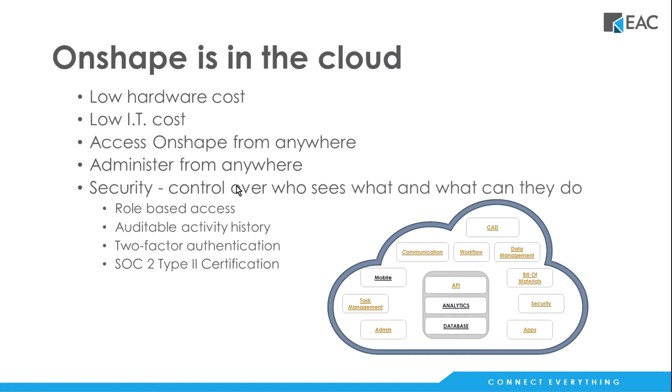It's also very secure in the cloud. We run on Amazon Web Services, but we have role-based access, a complete audit history of everything and everyone who has accessed or worked with anything. We also have two-factor authentication, and Onshape is certified to work with other people's data. That's what this SOC2 Type II certification is.

Interesting thing about Onshape is we release software all the time. Every 3 weeks, new improvements are added to Onshape, and everybody is on the same release. Since you're hitting the cloud, you're hitting the same version of Onshape, so you never have those issues of being out of sync with maybe another customer or vendor you're working with. Everybody is on the same version all the time.

Also for innovation, you know, some companies are a Dell house, an HP house, an Apple house. You don't have to be any house if you're working with Onshape. Any type of hardware you have, Onshape can use to work with. Very few people, I don't really know of any, but I'm gonna think there's gotta be somebody out there that is broad and available to use so many different hardware platforms, that kind of flexibility is what Onshape can do.

Also, speaking of innovation, we can talk about collaboration and communication, not only between us inside a company, but also with our partners or vendors maybe outside the company. There's real-time collaboration where we're working on the same geometry, the same drawings, the same information as everybody else. There's no copies, this concept of files and making copies and checking in and checking out and all the traditional stuff like that. It's not like that at all.

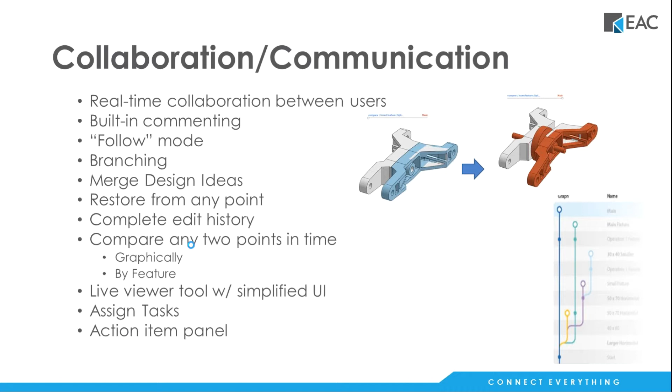We also have a great variety of design tools that allow us to do a lot of interesting things. First of all, we have a modern feature-based parametric system, but we also have the concept of multi-body or multi-parts. We can create a number of components in a single part, but those components can also be separate, used to make drawings of each one, and added to other assemblies.

Custom features, speaking of creating things that maybe don't exist in Onshape, everybody has the ability to create their own. There's also a library of customized features that people have made over the years, maybe for structural steel or gears or things like that. Those are all available—you just add them to your Onshape and you have those capabilities as well.

There are non-parametric editing tools. So if we're bringing in information to help us innovate, a lot of times we might have to leverage information that wasn't made in-house, maybe from industrial designers sending us ideas. We can bring that information in and work with it. Using non-parametric editing tools, we can still push and pull, change radiuses, move ribs, and do all those kinds of things to get things the way we want.

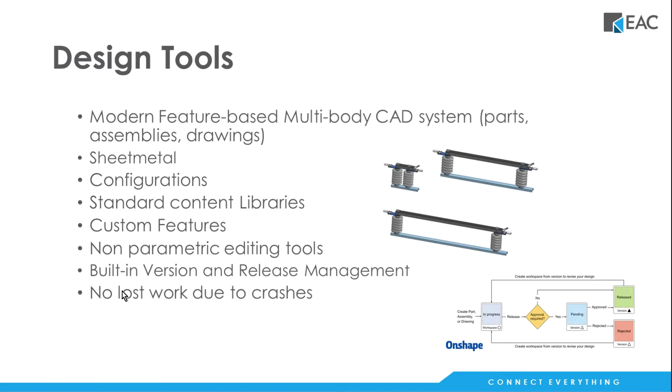So with that, let's kill the PowerPoint and talk a little bit about Onshape and work with it. I log into Onshape—this is my home page. Here I see components, assemblies, and things I've worked on recently, along with different folders that either I've created or other people have shared with me. This is how we organize our information.

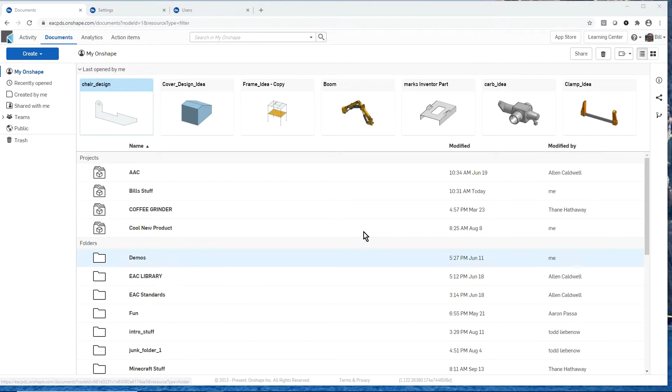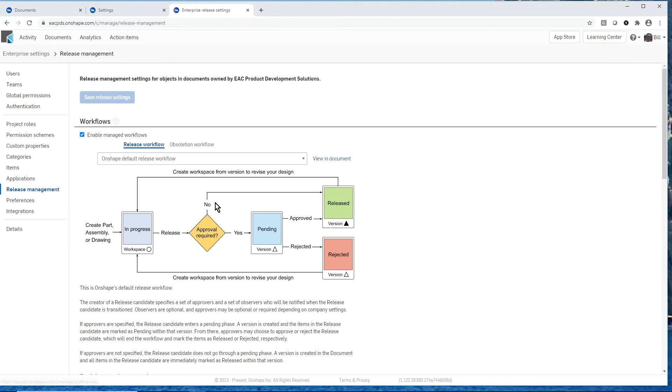We also have release management built in, which is that workflow we saw earlier. There's also an automatic part numbering mechanism, so we can have a prefix if we want, set how many characters are in our part numbering, and it automatically generates those part numbers as we go forward. This is customizable, but at least you have the capability to use automatic part numbering if you want.

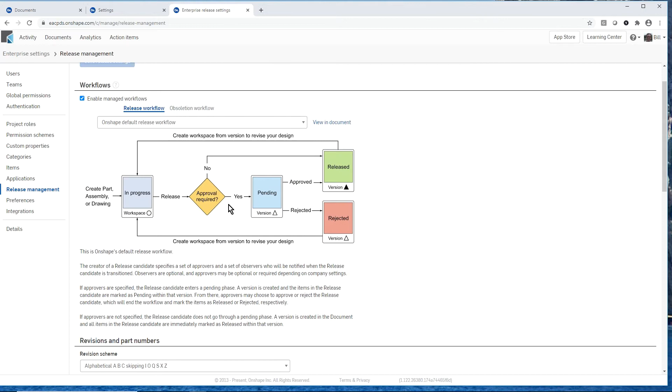From a personal or user level, we can set up our defaults—these are the questions you're asked the very first time you log into Onshape, like what kind of standard units you want to use. You can always change these later, but it wants to know a default. Going further, since most people using Onshape have come from another CAD system, it asks what CAD system you came from, so it can make the mouse behave exactly the way that system did.

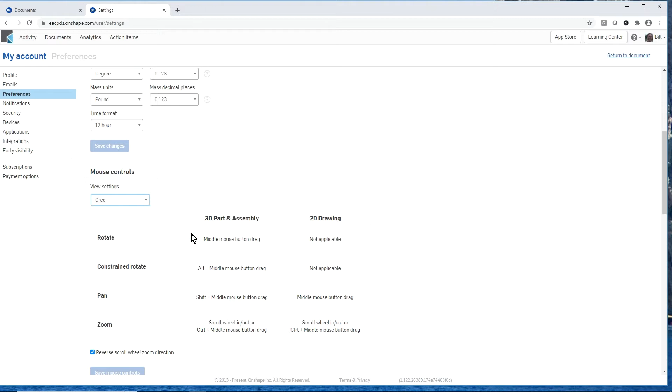So you can learn Onshape faster. There's also this capability, we see this in other systems, a little pop-up menu where we can customize the different commands that we want to have on that pop-up menu. Again, so we don't have to move our mouse and move our eyes, that fatiguing thing. If you're working on a CAD system or a computer screen all day, this helps alleviate some of the fatigue you get from doing something along those lines.

But let's go back and talk a little bit about Onshape. I'm going to open up what's called a part studio. So when you start Onshape, you start a part studio. A part studio is the information that you would store that has to do with a particular part or product that you're working on. So for instance, I have a sketch here that I'm going to start out with.

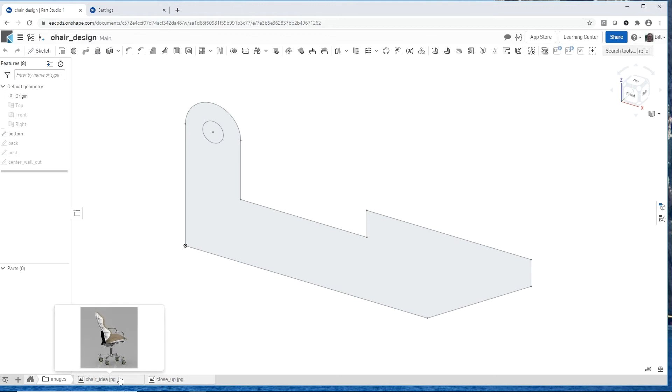But I also have some other information here. I put a folder in my Part Studio, and if I open that up, I have a couple of images. So where we're going to go today is we're going to design part of this chair that we see here. These are basically the components that support the chair. We can zoom in on that a little bit more and see a close-up. These will be the components right here that we're creating.

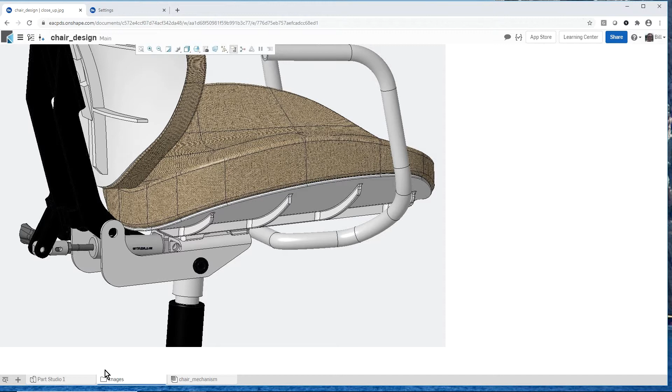And so this is going to be some information. We got this from our industrial designer. This is the kind of chair that I've developed. Can you now, as a mechanical person, develop this product so that we can sell it? So really, I could have spreadsheets in here, customer feedback, results from different types of analyses—all kinds of things can be stored in this Part Studio.

So let's go back and take a look at our sketch. Just looking at it here, it's really straightforward—just some lines, an arc, a circle. Nothing too crazy here, but we're going to use this as the base for our chair.

So you'll notice from the interface across the top that these are all the commands Onshape has. It's a very clean, easy to use interface, easy to learn. So here are all the things for parametric capabilities. Here are the non-parametric ones I mentioned before. If we're getting geometry that doesn't have numbers we can change, we can still grab faces and edges and groups of geometry and manipulate those.

We also have sheet metal capabilities, so we see those over here. And then here's some user-defined type features I mentioned before. Here's one for structural beams and things that I've added in that I use sometimes. So all the things that I need to create any types of geometry are right here.

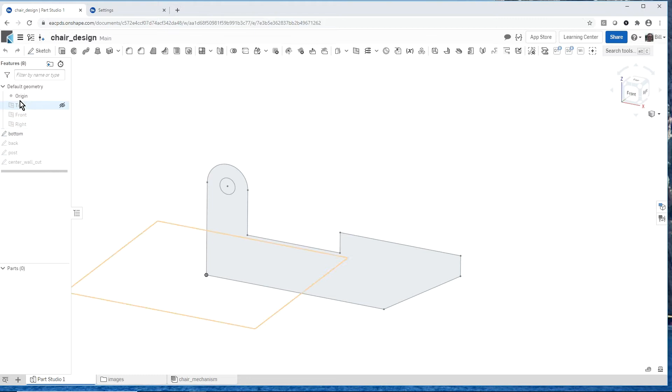Here's our feature tree, or kind of our history tree, everything that we've created. So you can see we started off with 3 planes, and then we got some sketches here. And we have no parts yet because we haven't created any geometry, but if we have multiple parts, they'd start showing up here. So let's start doing that.

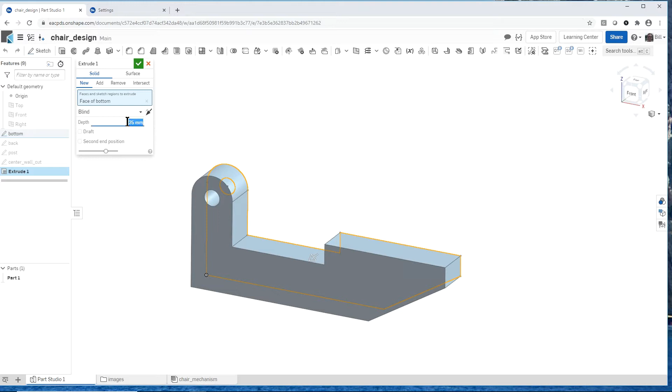So I'm going to grab this sketch, and I'm going to say let's extrude this out. We'll say we're working in millimeters, so maybe 100 millimeters, and let's maybe do it symmetrically, something like that. So now I have a first start at this.

So every feature that we create in Onshape has this type of an interface. We have all the options here, and then you either hit the check mark—you want it—or X, you don't want it. But you'll notice as soon as I put that in there, I put this in as part number 1. And I can name this whatever I want. I can assign material properties to it. I can change its color—all these types of things I can do with this particular part.

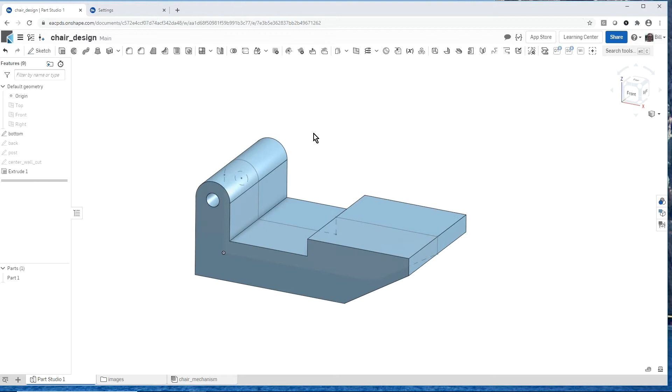So let's go in and hide that sketch for a second. Let's start to hollow this out. So I'm going to use a command called a shell. Typically you use that to make a thin-walled part, and this is pretty much kind of a thin-walled part.

Maybe before I do that, though, I might want to save myself a little bit of work by just putting in some rounds. So I'm going to say let's put in, maybe a radius of like 6, and add it to an edge here, edge back there, and then maybe put in a different radius. And again, when I start offsetting this by putting in these radiuses now, it's going to save me from having to put in 2 sets later on. And then let's just put in one last one, kind of a big one down on the bottom here.

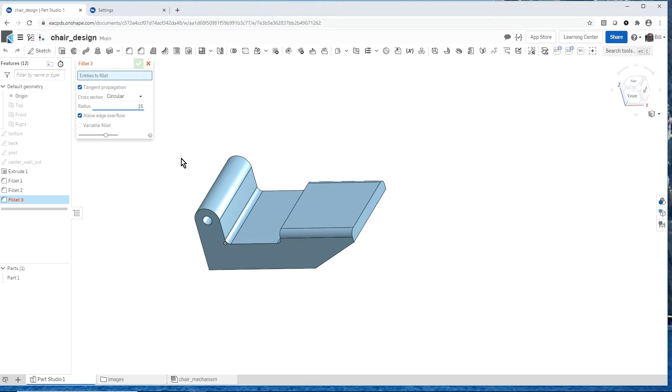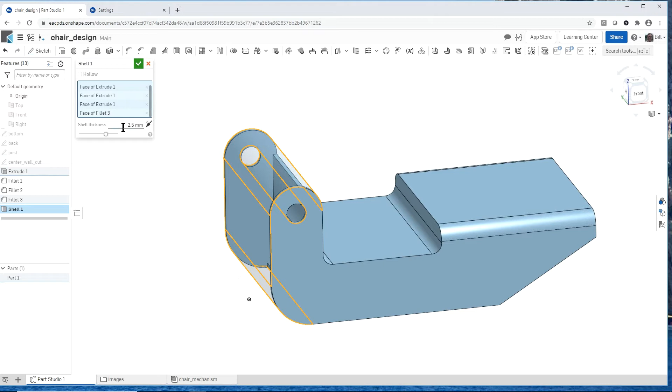So now we've got something we can start working with. We want to start hollowing this out, so I'm going to use the shell command and just remove some surfaces. All I do is pick on the surfaces and they start going away. I can specify the wall thickness, so let's make it about 4 millimeters thick. As I pick each surface, it removes that material and gives us a wall thickness of 4.

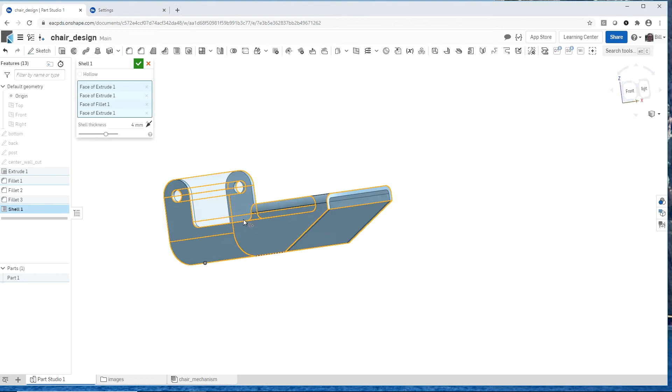So this will be our part so far, sort of a stamping or sheet metal part, but technically it isn't. We're going to have to create some other geometry for this. Obviously this is the bottom part of the chair that the seat sits on, but a chair always has a post on it, so I'm going to have to go create that.

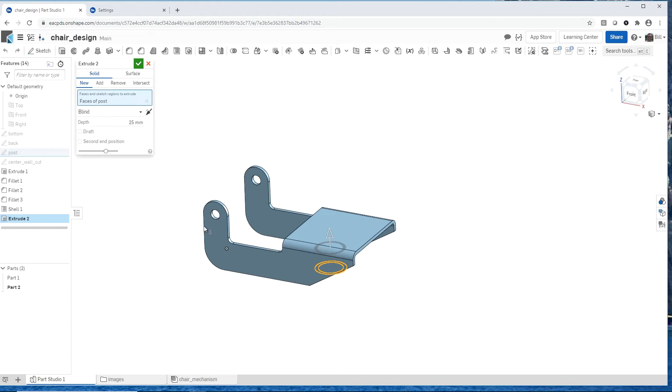So I have another sketch over here. I'm just going to take this and say let's extrude it. You'll notice the first time it extrudes, it asks do you want to make this a new part, do you want to add it to the existing one, do you want to remove it, or do you want to intersect it. These are the typical kind of Boolean-ish type commands.

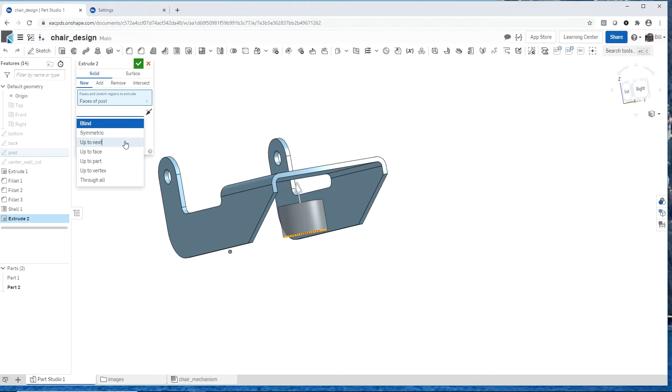We also have surfacing, so we could be doing this all in surfaces. What I'm going to do with this particular part is, instead of going blind distance, I'll say go through until you hit something. As soon as it hits that part, it asks if maybe you want it the same as this part. Notice it switched from being new to add, and we no longer have part number 2 down here—it's now considered part of part number 1.

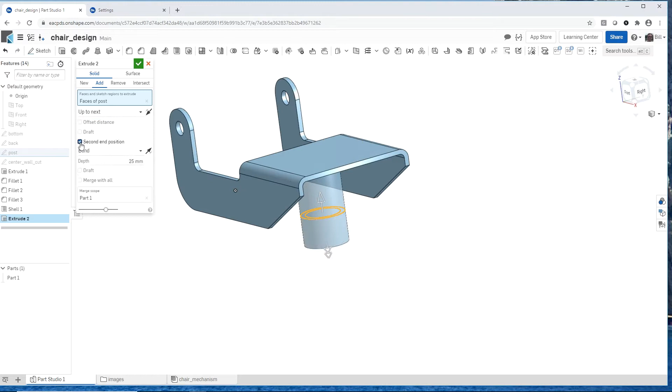I could switch it back and make it independent, but it's all part of the same part—they get welded together. And in the second direction, I want it to go down maybe about 25 millimeters. So now we've got a good start on the part we want to create here.

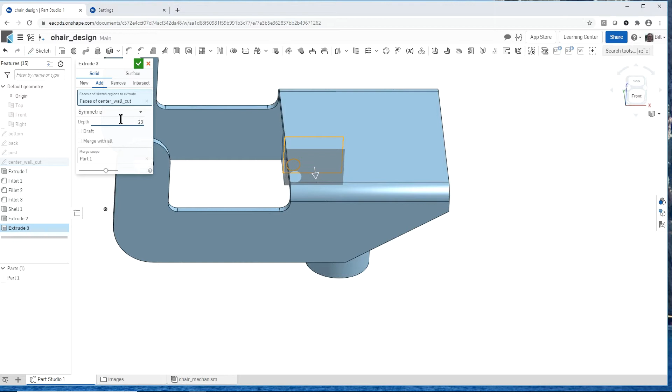Another thing I want to do is maybe make a cut in here. I'm going to take this and extrude it out symmetrically. I made a couple sketches in here to save some time—here's the thickness we want. Then let's take the same sketch, and this time we're going to remove material symmetrically with a different value. So now we're making a little cutout—this is what we have.

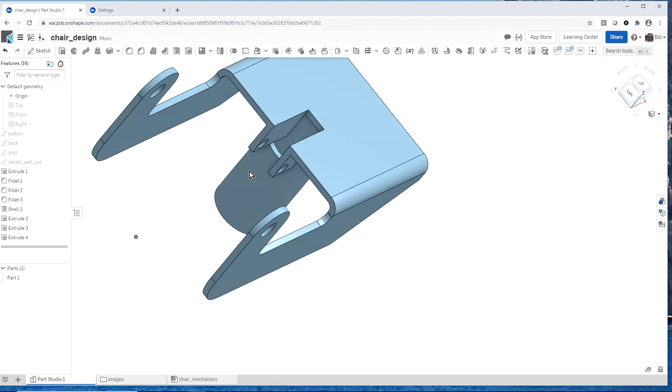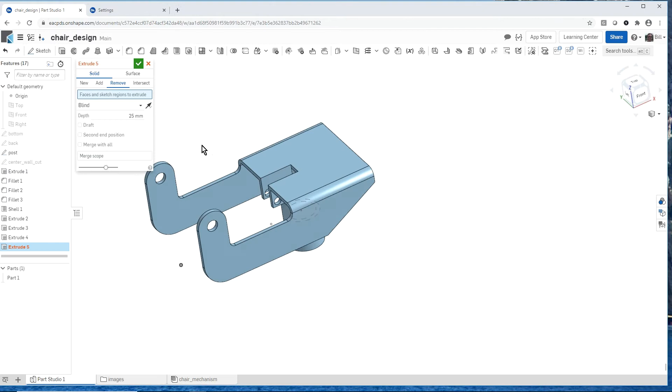One of the other things is the post still has to fit through here a little bit, so let's take that and extrude it up, and we'll remove material. We have to pick this face, that guy, and we'll flip it and just drag it through. Something like that—a clever approach would be to say up until surface or something like that, but we'll just leave it like this. We're just cutting some material through there.

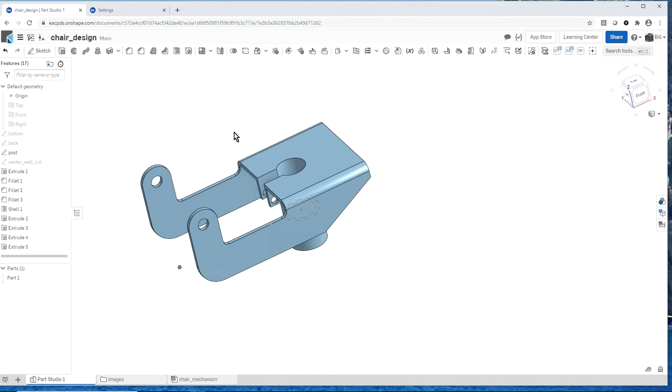At this point, maybe we're going to put in a couple other radiuses just to finish off the general idea. Maybe put this in, maybe a radius of 8, and then something along the top too to round that off.

So now we've got something we can work with—this is the start of our chair. Up until now, other than the fact that we've been in the cloud the whole time, it looks like a lot of other CAD systems out there.

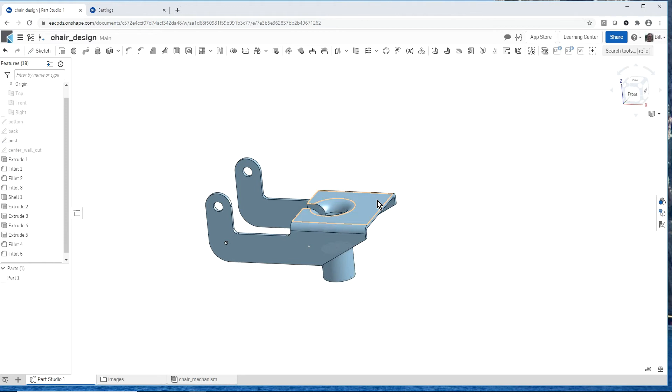What I'm going to do now is something other CAD systems can't do—I'm going to look for help. We have a guy in our company, not here with me, but I want to invite him to create a sheet metal part, kind of the back part for this. I can make some comments on things, pick on a surface and say I want you to look at this, and create a general comment. For who it's to, I start typing his name and it searches the list of people in my company. Here he is, and I'll just say, can you make a sheet part?

And I'm going to assign that to Nick, so it's going to show up on his to-do list of things to do. When I say assign now, he's going to get an email that says you are now sharing your part with Nick. Up until now, no one has had any access to this.

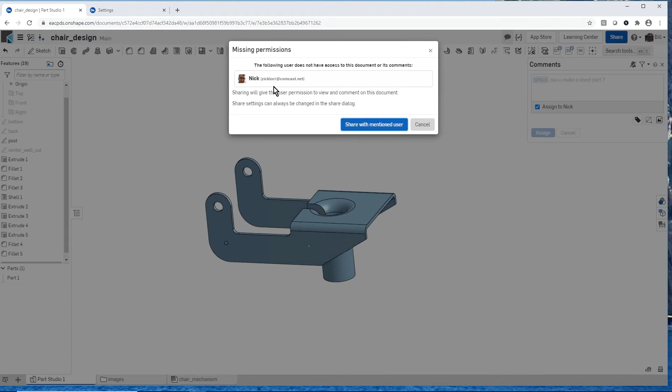So that's kind of the way Onshape works. You don't send out copies of things, you give them access. It's like a whitelist—who do you want to have access to this, and when they have access, what do you want them to do with it? You have total control. As soon as you don't want Nick to access the part, I just hit the little X next to his name and he no longer has access to it. But he gets an email.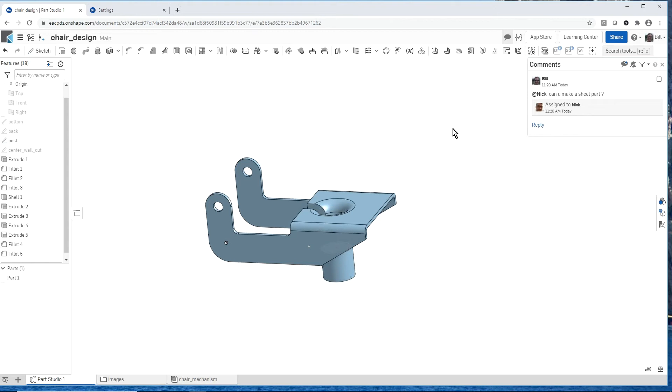So let's take a look at what that looks like. If he clicks on the email, so this is Nick over here, he'll log in, he'll sign in. The hyperlink said Bill's sharing a part with you, and you can see here, assigned to Nick: Nick, can you make a sheet part?

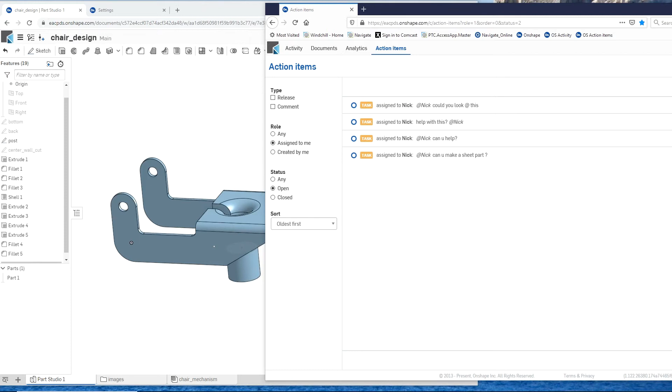So he can go and say, sure, let's take a look at this. He can select on it, he can see the chair here, and he can say, let's view this.

So the interesting thing here is that Nick is going to see the exact same thing. I'm inviting him into my session to start working with this. You notice his little comment screen is popping up, and he sees the same part—it's not a copy, it's the exact same part.

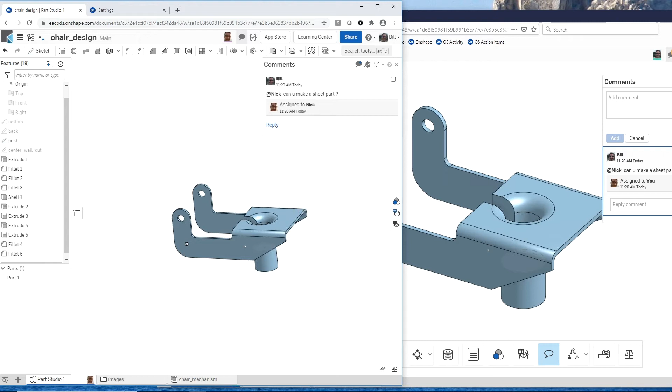Now, one of the things we can do is I could say I need you to work on this, and I can comment and things like that. But we can also do something called follow. So he's going to follow me, and as I zoom in, he zooms in. As I rotate, he rotates. So he is following me.

And really what I want him to do—you notice his cursor has changed to a pointing hand—I'm going to say we need you to create a sheet metal part in this area that fits between here and here, and will be the back part for the chair. So I can explain that in words, or call him on the phone, since he could be somewhere totally different than where I am. Lots of different ways we can communicate, working together collaboratively like this.

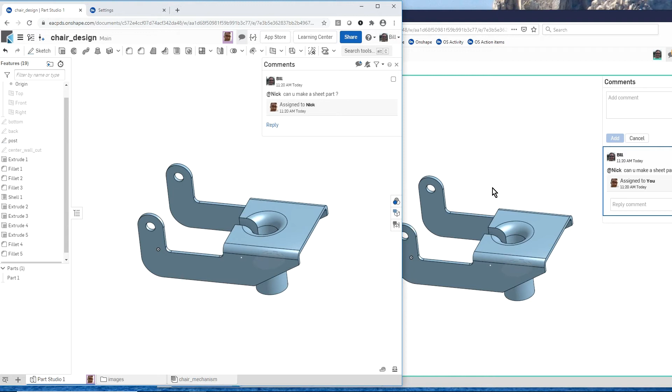He's also totally independent to do whatever he wants to. He's not forever tied to me and what I see. So one thing you'll notice is his menus are different than mine. He has the ability to do cross sections, make comments, change colors, explode things, measure things, but he can't create any geometry.

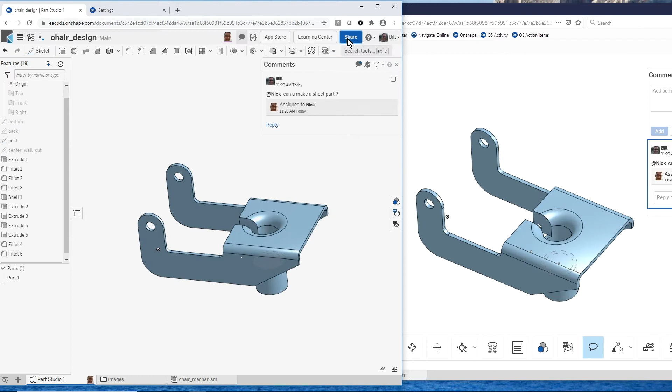So what I'm going to do is give him the capability to do that. Under our share settings, I can change it—right now it says he can view. I'm going to change that so he can edit things as well, create geometry. And I'll say he can make a copy of it, but I don't want him to export it out—I don't want this thing going anywhere else but here. Then I'll update his capabilities.

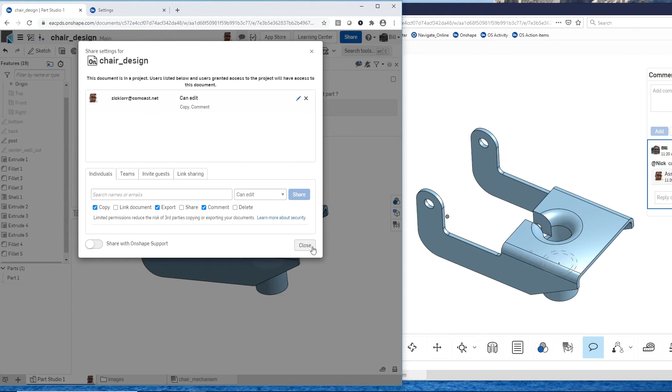So now all Nick has to do is refresh his browser, and you'll notice his menus down here will change, and he'll now have full capabilities to do the work he needs to do, while I keep working on this part. I could keep it like this where he's working with me in here, creating his part while I work on this one, since I've got other work to do, maybe make a drawing, stuff like that.

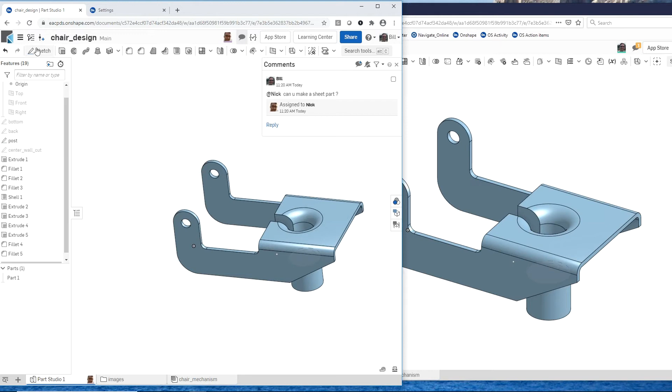What I'm going to do is take advantage of some of the capabilities Onshape has. First of all, we have the history of everything I've done here—where we started off, then inserted some features and created the post and all that kind of stuff. One thing I'm going to do is make a version—just save a snapshot in time and say at this particular point, I'm going to call this, I don't know, the make back part or something like that. So that's our version.

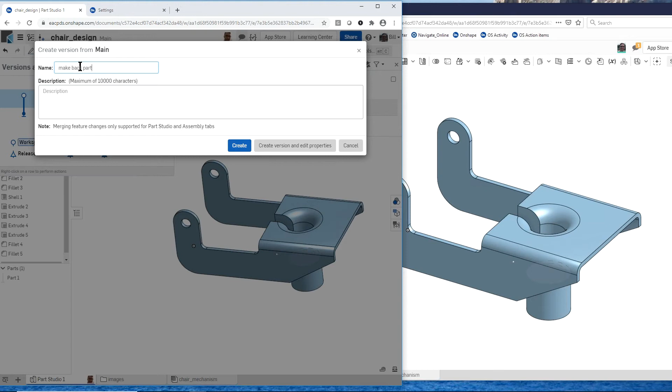You'll notice that's created in our history tree as a little filled-in dot. So I can always go back at this point in time and say, this is what it looked like before we made the back part.

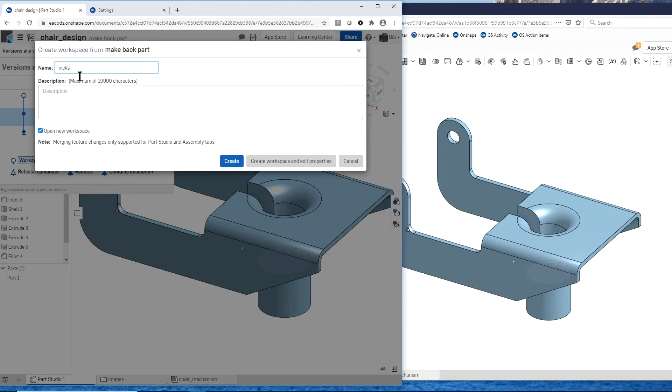But now I'm going to take this and say, let's create a branch. I'll call this Nick's sheet part, and I'm going to give him access to that branch so he can start creating geometry over there.

If I like it, then I'll say I want to use it. And if I don't like it, I'll say go back and refinish it. So either I can keep him working alongside with me in here, or I can give him a branch, and maybe a couple different people, let them do a couple different things at the same time, and then pick and choose which things I want to include. Could be more than one that I want to include.

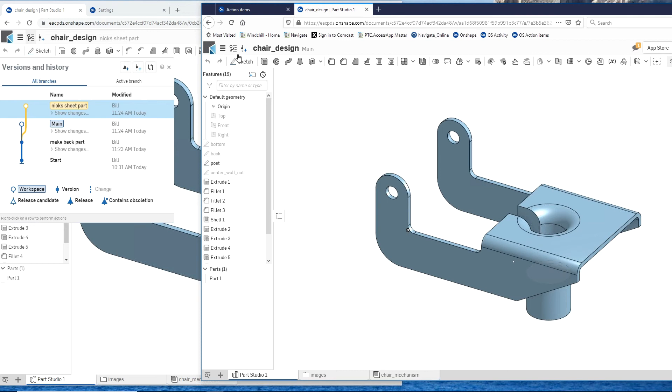So Nick will automatically see this, right? He can go back to this and say, okay, I'm going to work on my branch over here. And me, I'm going to just continue doing my stuff over here. One of the things that I can do is, I'll just show you one thing.

I'm going to say I want to create a chamfer, and we'll say maybe not a real big one. I'll put one here, put one there, put one there. Okay, Nick doesn't see it, right? Because he's in his own branch right now.

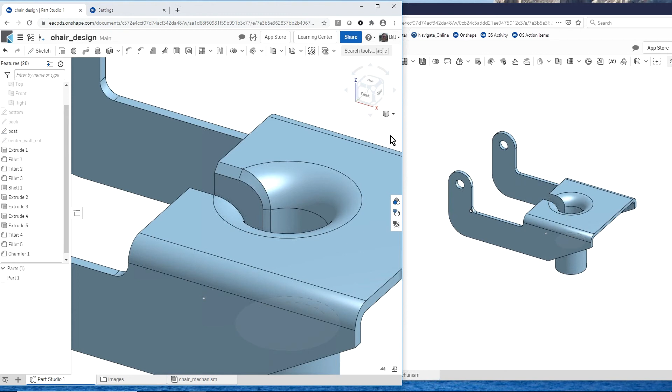So after all, then we can copy in his information. But right now we're kind of on the same part, the same concept. We're just branched off from one another.

So what Nick has to do, because he's kind of the sheet metal guy more than I am, he's going to start creating some geometry. So he's going to create this thing right here. We'll kind of extrude this guy out, we'll say symmetric, and let's say 92 millimeters.

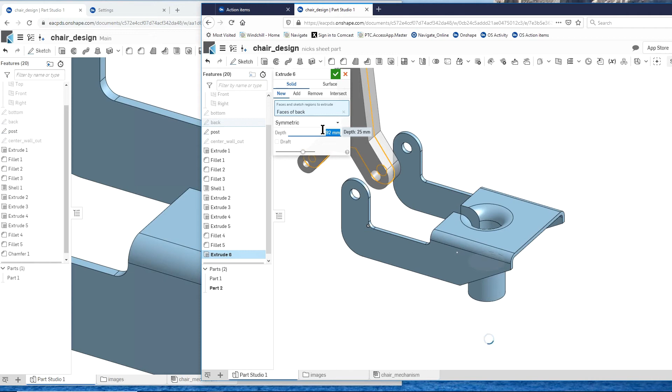So you notice his part kind of fits there, fits inside, so that will work out well for our needs.

One of the things, since he's kind of a sheet metal guy, he's going to have to turn this into a sheet metal part. We'll get a chance to see what sheet metal in Onshape looks like. So he can come in here and say, let's go in and create a sheet metal part, right?

There's a couple different ways that we can do this, but we're going to say let's convert this part into a sheet metal part. And then what we can say is we pick the faces we want to exclude, because we're not going to put sheet metal around all of this. So I'm going to say let's exclude, and it's sort of like shelling it out like we did before.

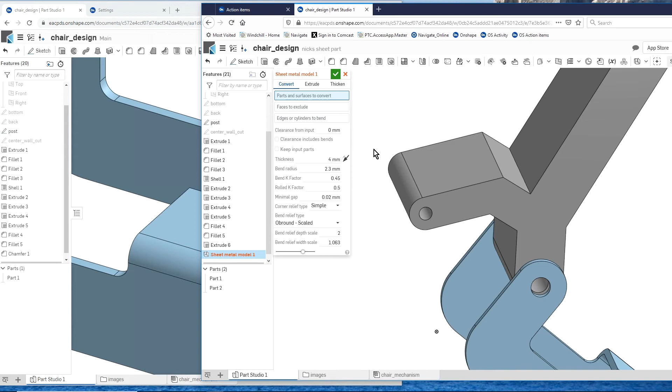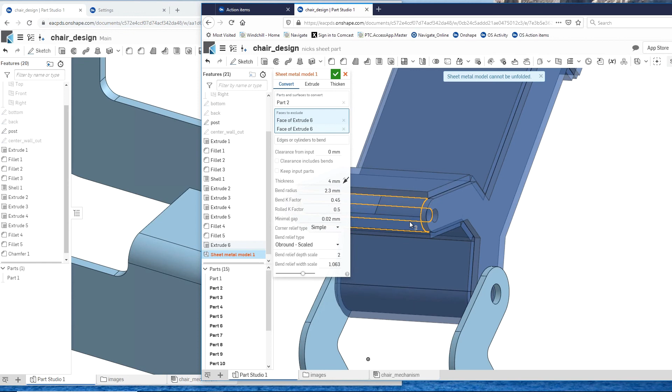So we'll say faces to exclude. Well, this is the part that we want to do too. And we'll exclude maybe like this face and this face, and this face. And what it does is it goes in here and starts putting sheet metal panels on all of this.

So it's a little bit different than other sheet metal applications that I've worked with in the past. And we can pick these and say which ones we want to keep or which ones we want to remove. In this particular case, we'll say that the thickness is 4 millimeters, yeah that's good, same as the other stuff. And then we just start picking some things that we want to remove.

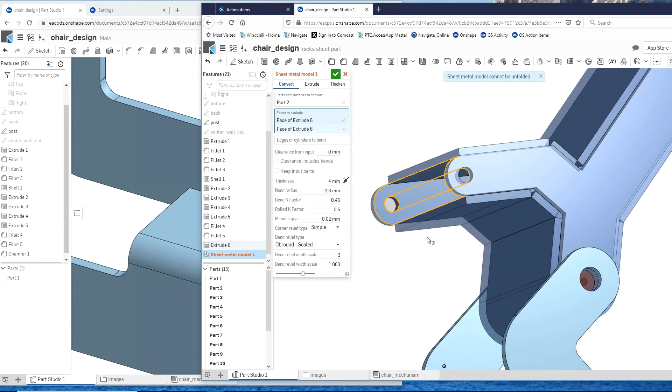Let's go back here. So going back here, let's go back and say some other faces that we want to remove. Let's pick on this guy and this guy.

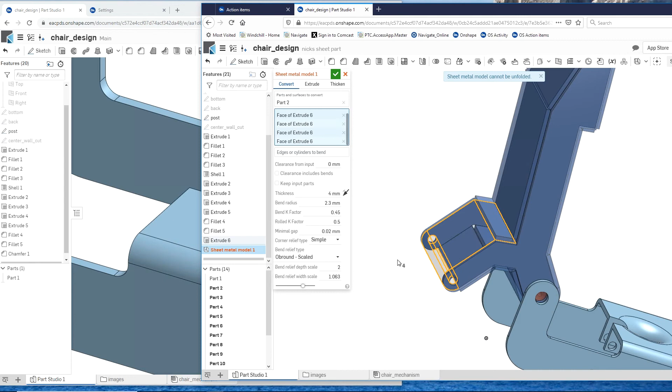I'm using Mozilla Firefox, and if I double click, it goes back into the previous screen.

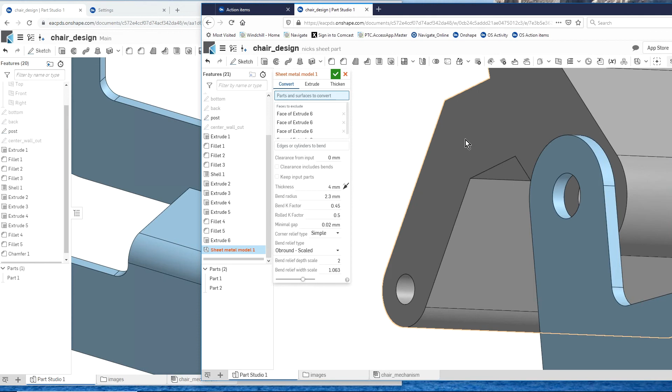So let's go in here. Let's remove this face. Remove, do this part. Remove that face. Let's remove this guy, that guy, this one.

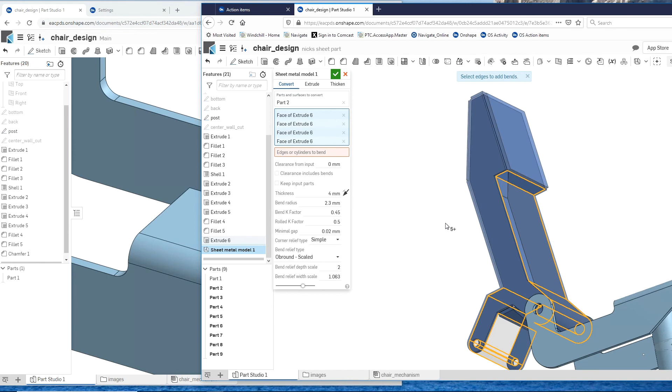That one. So you can see it's real similar to what we were doing before. Let's get rid of these two as well. But the difference being, let's kind of get rid of this guy as well.

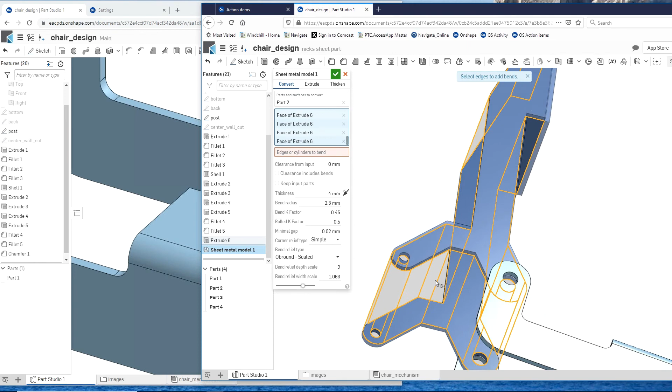All right, so now we've got our sheet metal part the way that we want. But we also want to put in a couple of bends, right? So we'll put in a bend here, a bend there. And you can see that it's put those in, and now we have our sheet metal component.

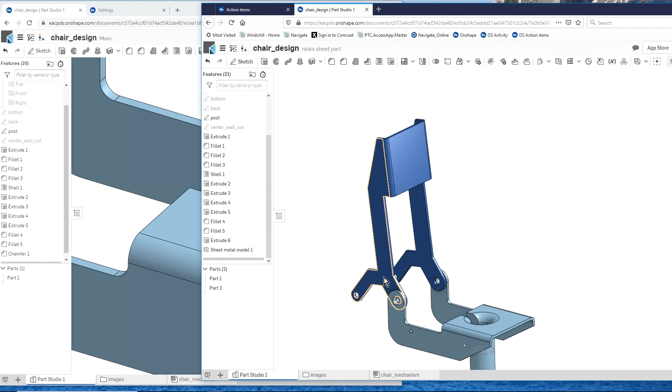So Nick can take a look at this and say, yeah, this is kind of good to go. He can send me a message then, comment that he's sending me something. I can come back now and kind of do a design review, so I'm going to come in and say, let's take a look at what Nick's been doing. I can come over and take a look at his work.

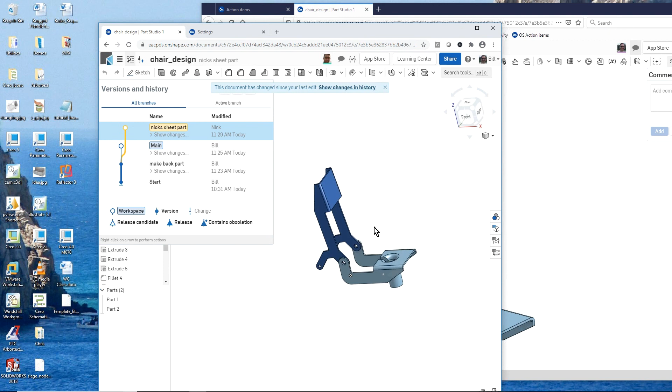And take a look at the sheet metal part. Yeah, looks pretty good, so I'm going to say let's include that. I like the design, so I'm just going to say merge it in. And now it's merged into my part, right, with our chamfer here.

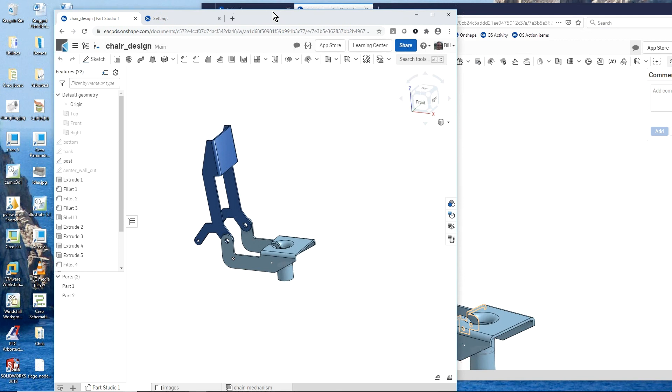Now, the thing is, the way they stand right now, I can pick any one of these parts and kind of move them around wherever I want. I'm going to take this part and just say let's fix him in space, because we're going to make a mechanism, since this articulates. And I'm going to take this guy, move him over here a little bit, and I'll say let's put a pin joint in.

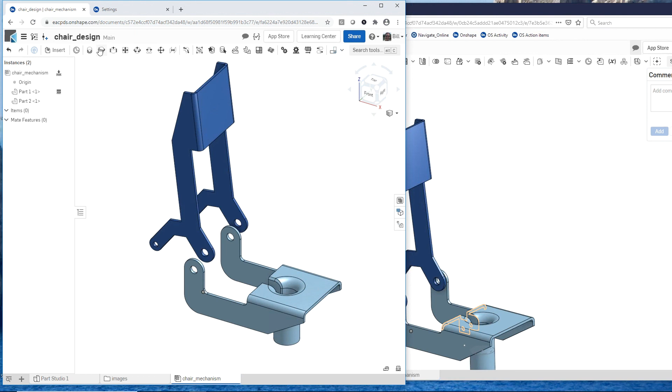So now we're in assembly mode. This is where we put parts together, and we'll say make the center of that hole line up with the center of this hole. So now it's a pin joint. And what that means is when we come back here, I can grab this guy, and now he articulates. So this is the way that we want our chair to behave.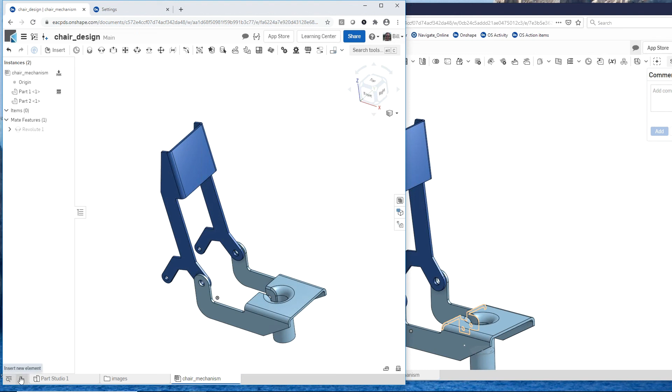The next step would be that we have this. I'd say let's go in and create a drawing. I'll put it on a C-size piece of paper. I'll maybe make my screen a little bit bigger here.

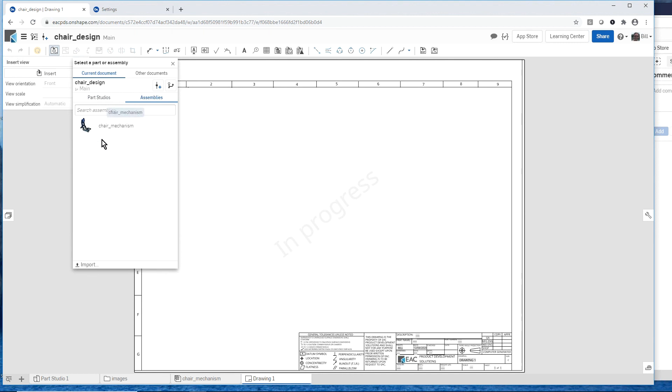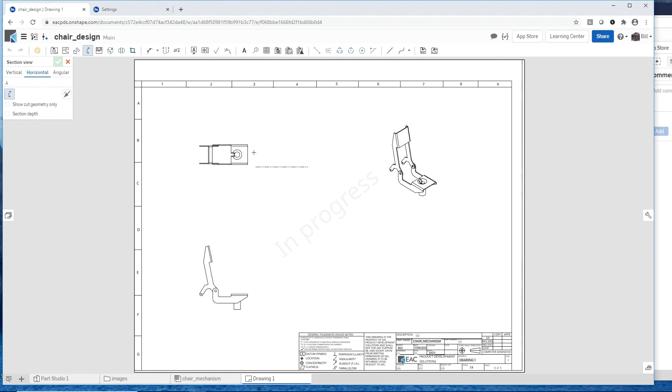And we're going to say let's put in our assembly. Let's put one here, put another version up here, maybe an ISO view over there. And then let's try something else—let's do maybe a section view, and we'll say horizontal right about here. I'll put that maybe right there, so I'll have a cross-sectional view there so you can see.

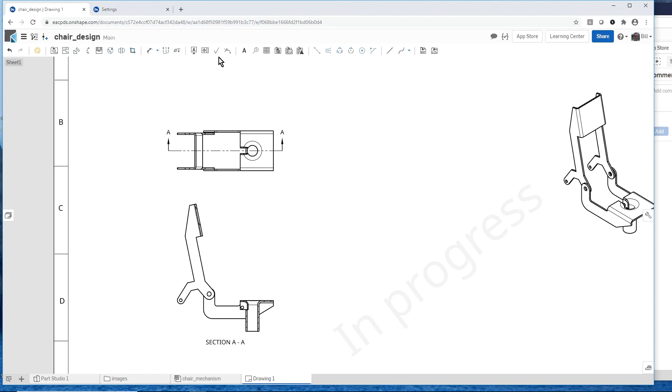And then maybe take our guy here. Now we'll keep the scale the same, we'll just move him down a little bit. And then we can start documenting, creating some dimensions here that might not exist in the overall assembly or in the individual parts. So create a dimension maybe from this face over to maybe the center of this guy.

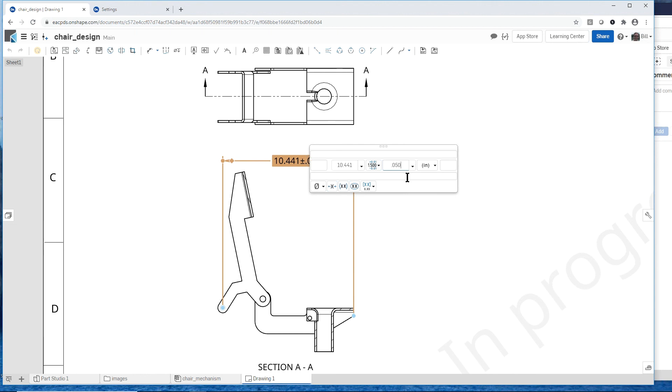And then if I wanted to put tolerances on there, we could say symmetric, plus or minus—you could say 50 thousandths. There we go. We can also come in and put in a bill of material.

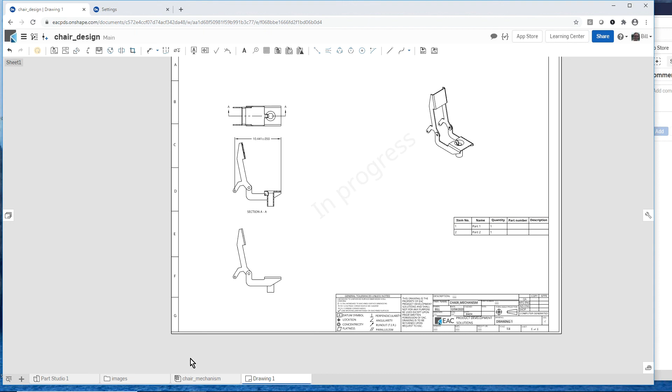So the BOM, let's see, we'll put him right here. Again, we just have the names of the parts here and the quantities, but we could put in part numbers, descriptions—this is all totally customizable. If we go back to our assembly, you can see that here. The bill of material that we create here is the one that we would see in our bill of material.

So maybe this part number we could say is—just move that to the left—and we might want to add in what state it's in. Is it released? Is it whatever? Put him in there. So now that's been added.

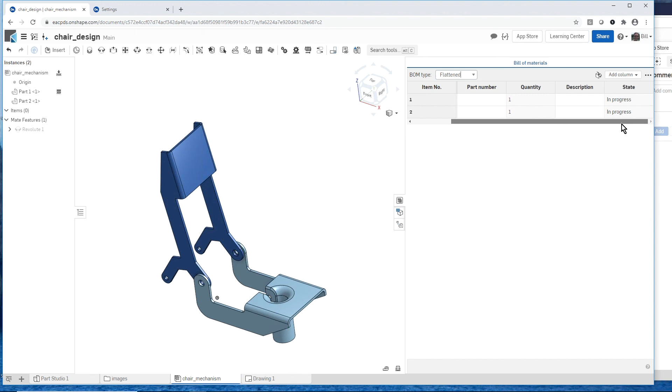If I go back to the drawing, it's not updated here, but there's a little yellow button saying this needs to be updated. So Onshape's really good—if things change, it tells you that they've changed, and it gives you the option to change them or not. In a drawing, yes, maybe we do, but maybe in an assembly, I'm changing a part that's used in 100 other assemblies. Maybe I don't want all those other assemblies to automatically update, so individuals can choose whether they want the newer version to update or not.

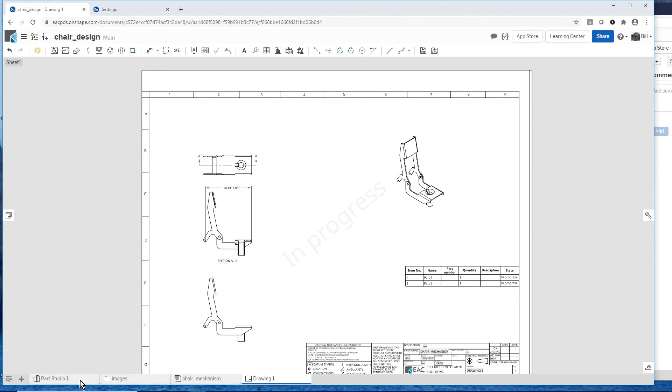But this is a little inside look into how Onshape allows us to innovate, design faster, and together, differently than any other system that's out there.